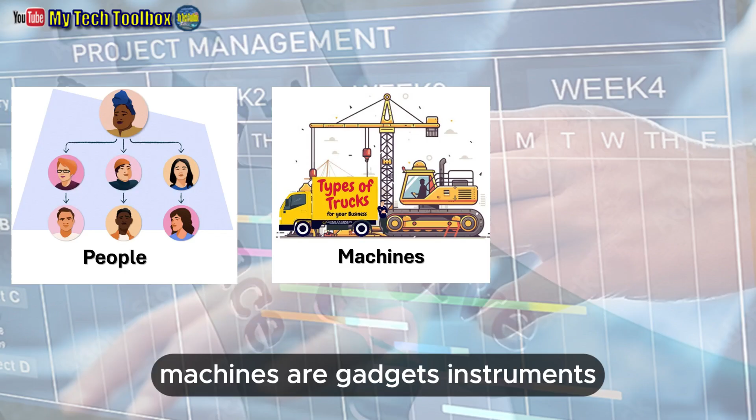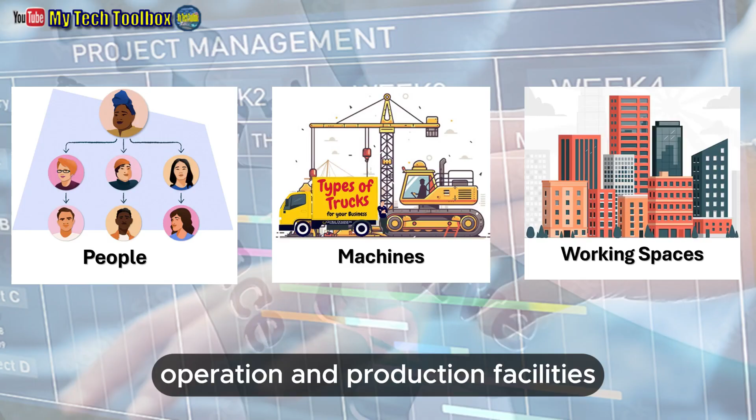People are officers, employees, customers or clients, contractors, suppliers, and service providers. Machines are gadgets, instruments, appliances, equipment and systems being used or providing services for operation, production, support and administrative works and activities that produce the company's products and services for its clients or customers. Workspaces are the office buildings, operation and production facilities, support buildings and facilities such as warehouses, powerhouses, parking areas, company grounds, perimeter fences and other amenities.

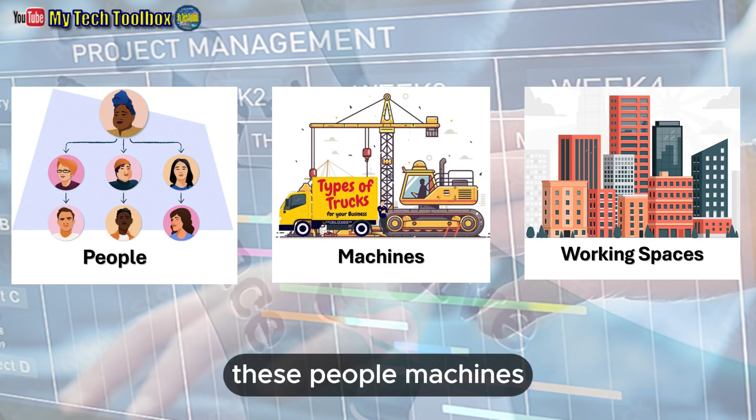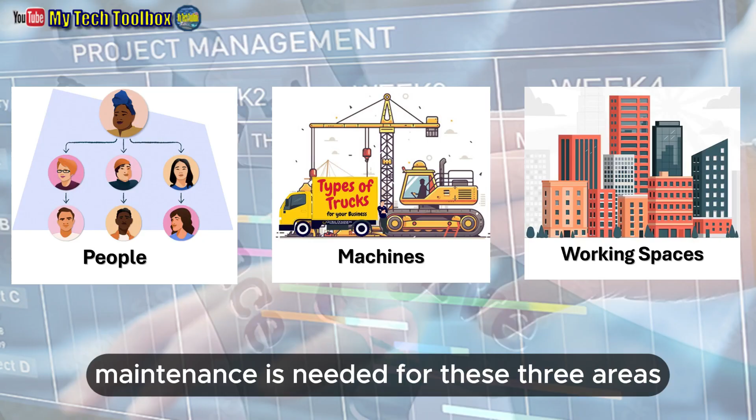These people, machines, and workspaces should and must be able to perform their respective functions to produce their respective output that will be converted into the company's products and services. Maintenance is needed for these three areas to perform and produce. Regardless of source, whether coming from in-house or from external providers, maintenance is compulsory. These people, machines, and workspaces are the main object or focus of maintenance.

They are the very reason for the existence of an entity, a body, a group, or a department that will deliver or render maintenance services. The purpose of maintenance is to ensure that these three areas, to perform and deliver as expected, are provided with adequate, effective, efficient and sustainable services. Having identified the focal areas of maintenance, the next concern is how to determine the extent and magnitude of the requirements of the three main areas of the company to which the maintenance services shall be applied.

To determine the maintenance services to be provided on the three main areas of business, two major steps have to be followed. Step 1. Identify the specific sections of each main area where maintenance will be applied. Step 2. Assess to quantify the extent and magnitude of maintenance requirements. Regardless of whether it is a new or existing business, the two-step process shall be performed on the three main areas.

First is the people area, consisting of: A. Company personnel, B. Customers, C. Clients, D. Suppliers, E. Contractors, F. Service providers, G. Other people who get inside the company premises to transact their business and seek the products and services of the company. Maintenance shall be responsible to provide these people with the necessary space for their activities.

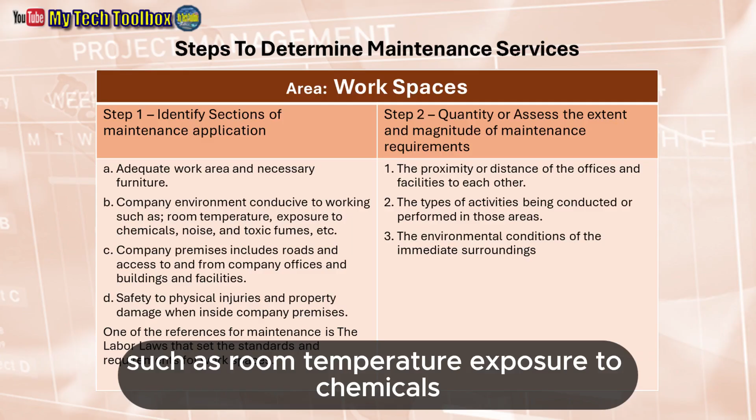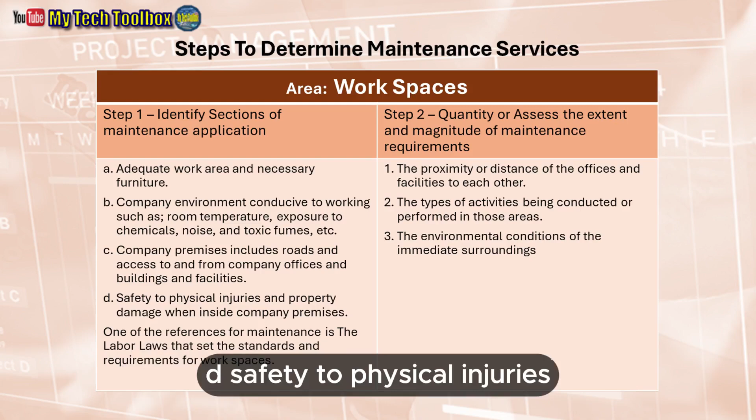The second area is the workspaces where people do their work and business activities. It includes, but is not limited to, the following: A. Adequate work area and necessary furniture. B. Company environment conducive to working, such as room temperature, exposure to chemicals, noise and toxic fumes, etc. C. Company premises, including roads and access to and from company offices, buildings and facilities. D. Safety from physical injuries and property damage when inside company premises.

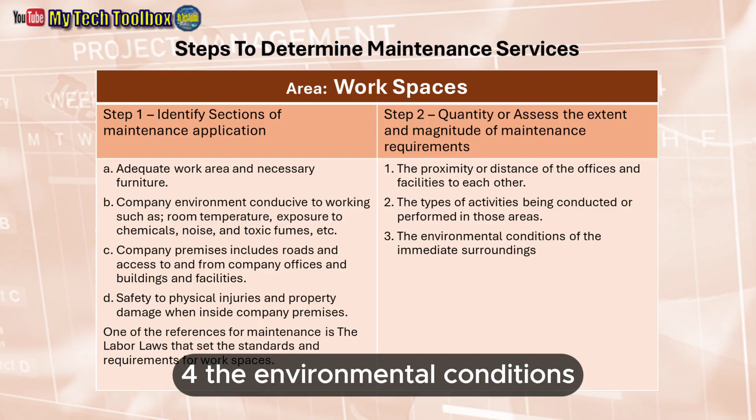In assessing the requirements for workspaces, the following are considered: 1. The proximity or distance of the offices and facilities to each other. 2. The types of activities being conducted or performed in those areas. 3. Those activities may require an appropriate work environment depending on the nature of the work being performed. 4. The environmental conditions of the immediate surroundings, such as pollution, temperature, water supply and sanitation, and even social activities.

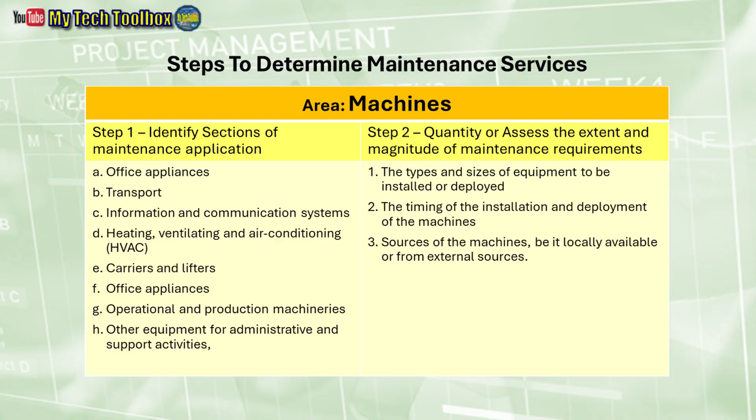All other equipment for administrative, operational and production use. Maintenance requirement parameters for machines are the following. A. The types and sizes of equipment to be installed or deployed can be determined with reference to the working space and people requirements. B. The timing of the installation and deployment of the machines shall coincide with the development plan or construction and availability of the workspaces. C. Sources of the machines, be it locally available or from external sources.

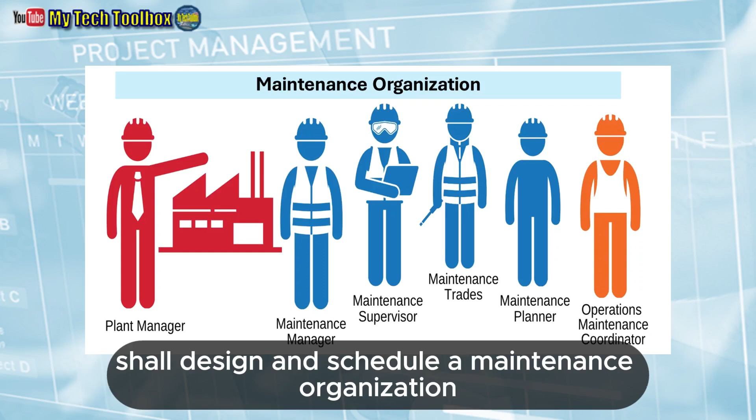Having determined the maintenance requirement of the company, officers and personnel of maintenance shall design and schedule a maintenance organization with proposed maintenance strategy and desired resources such as personnel, materials and supplies, tools and maintenance equipment. It shall be understood by the whole organization of the company the essence of the maintenance organization. A company maintenance policy would be the best instrument to this effect. Such will foster understanding, effective communication and collaboration between the maintenance department and all client departments who are recipients of maintenance services for the success of the whole company.

Having learned the company structure and the main focus of maintenance, officers and personnel in the maintenance department shall understand the purpose of its existence. They shall be committed to their duties and responsibilities to fulfill their purpose and achieve what is expected from them. The ultimate purpose of maintenance is to ensure that equipment, machines, and facilities operate optimally, extend their economic life, prevent disruptions, minimize costs associated with breakdowns, and maximize productivity. Finally, the key aspects of the purpose of maintenance are herein defined.

1. Ensuring asset reliability and availability. Maintenance plays a crucial role in ensuring that equipment and systems are reliable and available when needed. This involves implementing proactive strategies like preventive maintenance and condition-based maintenance to minimize the risk of failures and downtime. Reliable assets contribute significantly to overall productivity and return on investment (ROI).

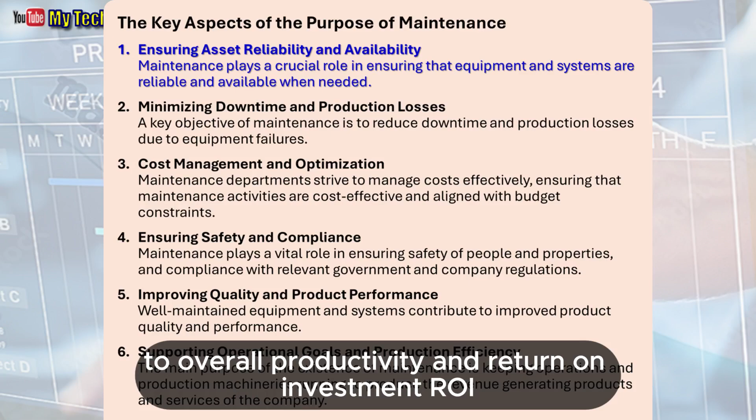2. Minimizing downtime and production losses. A key objective of maintenance is to reduce downtime and production losses due to equipment failures. This is achieved through proactive maintenance strategies, efficient repair processes, and optimized scheduling. Minimizing downtime helps maintain production throughput, meet operational goals, and reduce associated costs. Maintaining equipment in optimal condition also helps to extend its economic life and reduce the need for premature replacement.

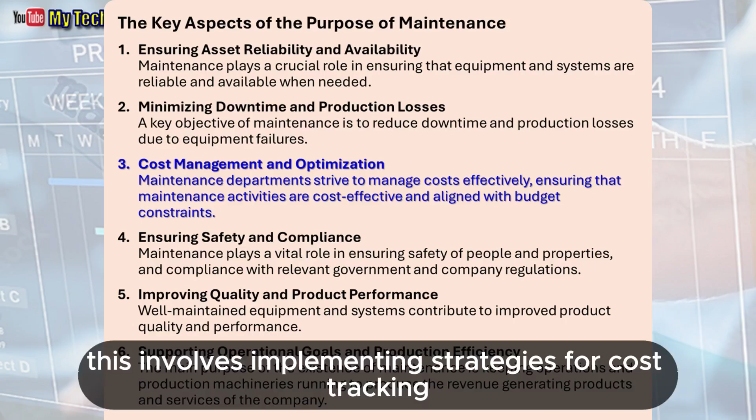3. Cost management and optimization. Maintenance departments strive to manage costs effectively, ensuring that maintenance activities are cost-effective and aligned with budget constraints. This involves implementing strategies for cost tracking, optimizing resource allocation, and utilizing cost-effective repair and replacement methods. Maintaining equipment in optimal condition also helps to extend its economic life and reduce the need for premature replacement.

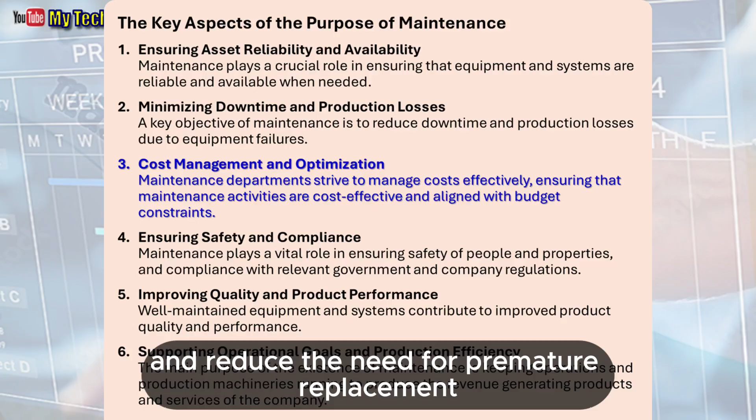4. Ensuring safety and compliance. Maintenance plays a vital role in ensuring safety of people and properties and compliance with relevant government and company regulations. This involves implementing safety procedures, conducting regular inspections to identify potential hazards, and ensuring that equipment and systems meet safety standards. Maintenance also helps to comply with environmental regulations and ensure responsible waste disposal practices.

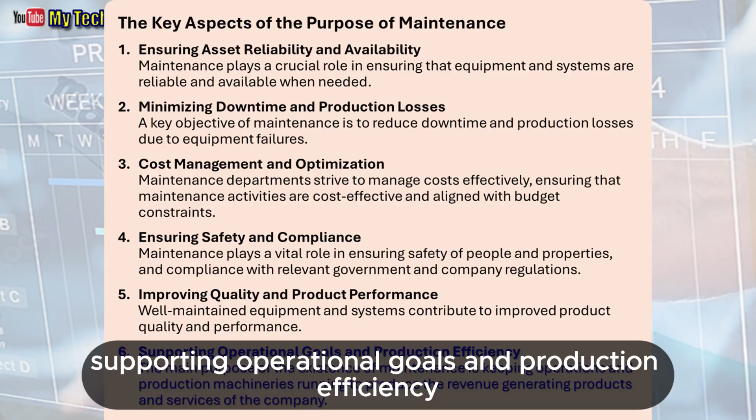5. Improving quality and product performance. Well-maintained equipment and systems contribute to improved product quality and performance. This is achieved by ensuring that equipment operates efficiently, reduces the risk of defects, and minimizes errors. 6. Supporting operational goals and production efficiency. The main purpose of the existence of maintenance is keeping operations and production machineries running to produce the revenue-generating products and services of the company.

Maintenance departments work in close collaboration with other departments, particularly operations, to support production goals and improve operational efficiency. This involves providing timely and reliable support for equipment and systems, ensuring that production processes run smoothly, and minimizing disruptions. By optimizing maintenance practices, maintenance departments contribute to overall productivity and operational success.

While the ultimate purpose and key aspects of maintenance we have thoroughly discussed, it is but vital for you to be on top of the key issues and negativities that you may encounter in your own organization. Knowing these issues in advance, you will be in the best position to address or respond to them.

To wrap this learning module, we have discussed the roots and the reasons that warranted the existence and purpose of maintenance in a company. This information is very important for you people, particularly in the maintenance department. This will provide and create internal motivation and commitment to your job, to the purpose of your department, and the success of your company. I hope that you have learned something useful from this video.